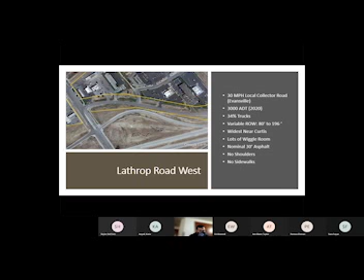Here's Lathrop Road to the west. The right-of-way narrows down to about 80 feet out in here. It's all 30 miles an hour. Functions as a local collector. It really doesn't have any problems, and we don't foresee any capacity problems, at least nothing in the near future.

What isn't there is pedestrian facilities. You've got a pedestrian generator right here, mobile home park. You've got pedestrian attractors down here, all these restaurants and commercial facilities, and no way to get between them without walking in the grass or on the road. So that's an issue to be addressed.

Here's Blackmore Road. As I said, it was realigned. It's about an 80-foot right-of-way. It was realigned about 2003.

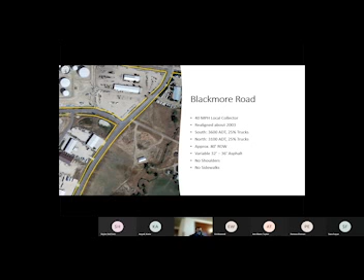Right now it has a maximum of about 3,600 vehicles per day. And what you'll get during the peak hour is about 1/10 of that. So it'd be about 360 with a 60-40 split. So you're looking at, a PM peak hour, 360 vehicles, about 200 in one direction, 160 in the other. So it's really not that busy traffic. If you think about it, 360 vehicles in 60 minutes works out to 6 vehicles a minute. So it's pretty easy to get across.

Here's US 20/26 Yellowstone Highway. This one has about double the traffic as Blackmore. It's a 55-mile-an-hour state principal arterial. That might need to change. What's happening is all that urban development is taking place on a road that used to be a rural highway. Now it's an urban area, so it's time to rethink what speed is appropriate in that location.

Another interesting aspect of this is, and we've got a comment from a citizen about a pedestrian crossing in this area. The nearest pedestrian crossing is 1.4 miles away. And I went out there with two experienced traffic engineers, and they looked at it and they said, we don't want pedestrians out there. So there's this conflict going on between the safety of pedestrians and asking them to walk almost 3 miles round trip to the nearest crosswalk, which is unrealistic. They're going to cross somewhere. Somebody's going to need to cross, and they're going to cross somewhere. So some solution to that is necessary.

One of the problems with this location is this is a crowned surface, and what that means is the road's tilted as an arc, like so. So when you look at on the near side, you can see the lanes. But when you look at the far side, you can't see the lane stripes because it's lined up with your eyes. The road surface is right there, so you can't see your target lane from Blackmore Road. That's another concern.

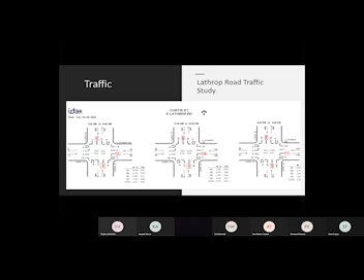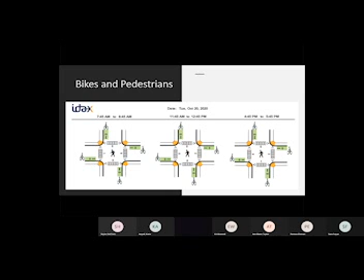Here's pedestrians and bicycles. On this particular day it was kind of chilly, so there weren't any bicyclists out, but there were quite a few pedestrians. During the AM peak there was only one here. There were 5 here. During midday there were 2 that crossed on the east side. Then during the afternoon peak there were 4 on the west side, 2 on the east side, and 1 sprinter. There's no crosswalk there. I don't know if he made it all the way across in one jump or if he stopped at the center turn lane, but there's a reason why people do that.

We've got quite a few trucks - in some cases 35% trucks, which is pretty high. Other places have fewer, 20% or so. But the WYDOT design vehicle for all WYDOT roads, including Curtis Street and US 20/26, is what's called a WB62, a 62-foot long semi. So the geometry of the road has to accommodate that vehicle, and when it turns, it sweeps out this path. If it makes a U-turn, it sweeps out that entire width you see here. If it's making a short turn, the width is much narrower. If it's making a 90-degree turn, the width is like that. So that's what the roadway system has to accommodate geometrically.

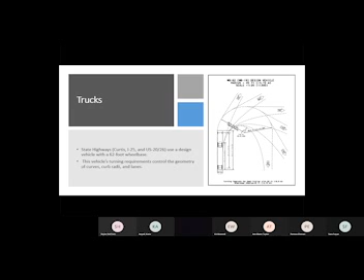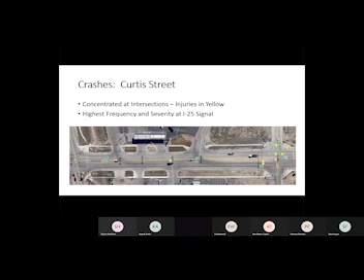We've got a few of these crashes that were keyed onto Curtis Street. And then when I asked for the Lathrop Road one, this is what they came up with. There's 10 of them that were keyed onto Lathrop Road. So that intersection is having a lot of crashes, you know?

So all this data is pointing to one thing. We've got a lot of vehicles crossing each other. We've got tire marks on the pavement showing that people are squawking it to get out of there, and the pattern is proving it out.

I did want to point out down here where I said there was very low volumes, there's no crashes either. Traffic causes crashes, and there's no traffic, so there's no crash. Now here's the intersection of Blackmore and US 20/26 Yellowstone Highway.

This one here, I described a problem where it's difficult for a driver at this location to see where he's going out here because of the crown of the road. Looking at it from straight above, you can see the stripes and everything's obvious, but from the ground level, you can't see it.

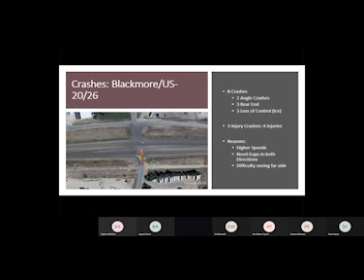That covers the safety aspects. I wanted to talk about roadway functional class, which is another exciting aspect.

There's basically 4 types of roads: a freeway, an arterial, a collector road, and a local street. And they have different functions.

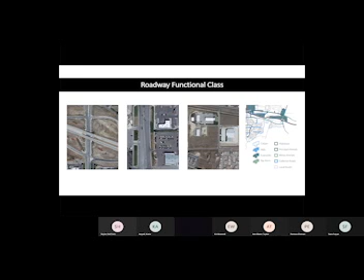This is just repeating what I just said: higher speed for mobility like freeways, stepping down to arterials, collector streets, and then local streets. The speed goes down, the number of driveways goes up. The purpose of local streets is for access, the purpose of major arterials is for mobility, and there's a step down in between.

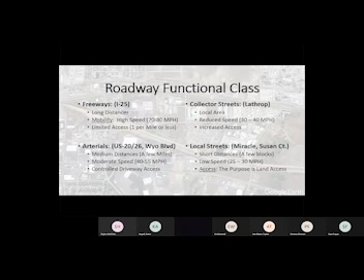So we're looking at this from a standpoint of making the roads function the way they're intended and function more safely. Access management is a key principle of doing that.

Now, I just wanted to compare the slide on the left and the slide on the right. The slide on the left has 3 driveways, and there's no median, so it's wide open movements. Each one of these can turn right, turn left, go straight across, people can turn right in.

And when they do that, each one of these has 8 conflict points. So you can get hit here, you can get hit here, you can get hit by this movement. When you put them all together, you've got 24 different conflict points, or 24 different places where a crash can take place, where vehicle movements are crossing each other. If you reduce that to one driveway, it reduces the number of conflicts from 24 to 8.

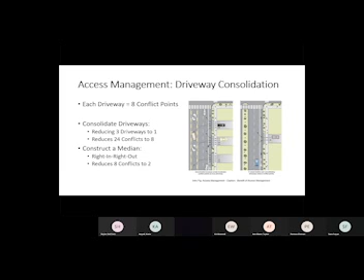Here are a couple more ways. This one shows a median with a cut through. Here you allow a left turn out of the driveway, and he can hit the people turning into the driveway, he can hit somebody crossing this way, he can hit somebody crossing in the other lane, and he can hit somebody crossing in the opposite lane.

So this is kind of like Lathrop right here. Lathrop's, you're trying to make a left turn, and there's 1, 2, 3, 4 different places you can get hit. And that's what drivers are contending with.

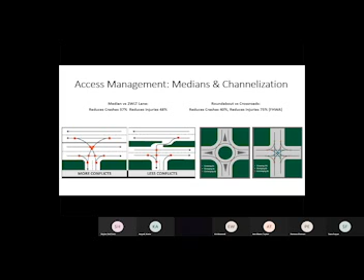By comparison, if you put a median or a roundabout in the center of this and force everybody to slow down, you go from 32 conflict points to 8. Instead of being crossing conflicts, they're merging and diverge conflicts, so they're much slower and much more survivable. Put simply, in this type of crossroad intersection, the penalty for a mistake is very severe. In this roundabout type intersection, the penalty for a mistake is a fender bender, but you probably will not get hauled away to the hospital. So that's an important point.

Here's another type. This is unusual. This is a median U-turn, or indirect left turns. They were invented in Detroit, and there they call them Michigan lefts. In this case, you just eliminate the crossing movements, you eliminate the left turns here, and they're all gone.

So the only thing you can do, say if you're on Blackmore, is to pull up here, look to your left, nobody coming, make your right turn, stop here, look to your right, nobody coming, complete your turn. This takes the complexity of that decision coming off of Blackmore and simplifies it. Instead of looking in two directions where it's hard to discern what's going on, you only look in one direction, and the same thing in the opposite direction. So it separates out those two decisions into two separate locations, so you don't have to do it all at once. You don't have to have eyes in the back of your head.

So are there any examples of this anywhere right now? No, nothing quite like this. Now, Jeremy, you were saying you had something similar to this? I was thinking about some of the mitigated medians at CY and Hopper, going by Albertsons and things like that, but nothing quite like this.

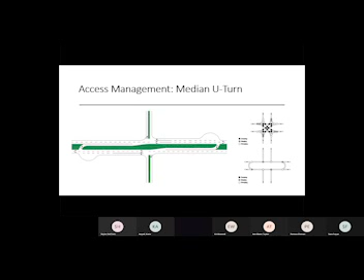Like I said, I've got a better slide here in a little bit, I'll show you what it looks like. But at any rate, you've eliminated a lot of conflict points here, and you've solved some of the issues. But no intersection is perfect.

Here's a non-motorized system, or half of it anyway. There's a pretty good sidewalk on Curtis Street, this is the east side. I do not know what this is for. There's this gravel area that chunked out of the sidewalk, and I don't know how that got there or why.

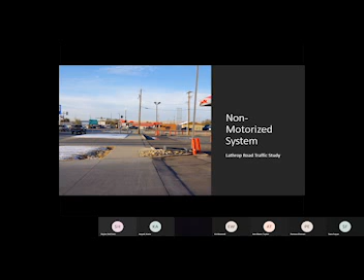I found a sidewalk over in Cokeville that has a telephone pole in the middle of it. Why they built it that way is anybody's guess. But looking at the existing sidewalks, this is it—this is all there are in our study area.

They're in pretty good condition and follow the outside right-of-way along Curtis Street. This is the east side of Curtis, this is the west side. This is US 20 Yellowstone, and this is the I-25 westbound ramps.

The east sidewalk comes along here, then goes across, and then there's no sidewalk over here—I don't know why. On the west side, it continues; you can see the sidewalk on this side. The crossing is kind of misaligned, I'm not sure how that was laid out, but you've got pretty good pedestrian service along here.

The sidewalks are nice and wide, meeting Americans with Disabilities Act standards. They've all got ramps and are at least 5 feet wide, so they're sufficient for what they do. But there are no sidewalks on Lathrop, none at all on Blackmore, and those are becoming issues.

Here's the crosswalks—you have 2 crosswalks on Curtis. One is right here, a marked zebra crossing with pedestrian-actuated signals and a walk/no walk sign. Same thing down here, except there's no zebra crossing, no marked crosswalk, but you do have pedestrian-actuated signal heads, so there's a pedestrian phase if the pedestrian pushes the button.

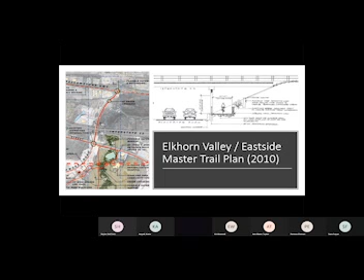So rather than try and compete with it, we're going to work with it. We propose to build a crosswalk from Lathrop across Blackmore to the Blackmore Trail, so they'd be able to connect in either direction to the rest of the network. The hope is at some point they'll build a trail on the other side as well.

Our natural assets inventory was part of the study, and this is Pat Ehrman. She's a very intrepid landscape architect. On this very cold day, she walked the entire corridor, making notes, taking pictures, and seeing what was there. She spotted a lot of stuff and came up with some great ideas. I'm just glad she's part of the team.

So what did she spot? This is one of the pictures that she took up on top of the hill. I think this is near one of the hotels.

Outback, yeah. From here you've got a really broad vista, and this whole area between that parking lot and Lathrop Road is all public right-of-way. So there's plenty of room here to have some kind of pedestrian waypoint where you could have a bench, maybe even a shelter of some sort, so that pedestrians, after climbing the hill or on their way up, see the view and want to stop and enjoy it. They could sit right there and enjoy the view and rest for a minute on the way down the trail.

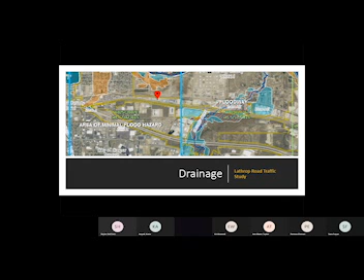Utilities - Mr. Lambert finished up working with Shane yesterday talking about issues in here. I won't go into an incredible amount of detail other than to say, and Shane correct me if I get this garbled, the study area seems to have plenty of wastewater capacity. There are some concerns about the potable water system.

There are 2 water tanks. I'm not sure exactly where they are - this scale is difficult to see - but there's a lower water tank and a higher water tank. In order to serve this area, which is higher than the rest of Evansville, water is pumped from the lower tank up to the higher tank, then flows down by gravity to service this area.

What Lou is saying is there's not a lot of locations where the future system was well thought out. It's not well looped. Typically, when you build a water system, you want 2 loops so it can flow in both directions and get better capacity. Also, there's only 1 line that runs up to the higher water tank, so if anything happens to that line or the pump, you lose water in this whole area. That's a place where a redundant system might be a good idea in the future. But I'll leave it at that and let the engineers talk about it in detail on their own.

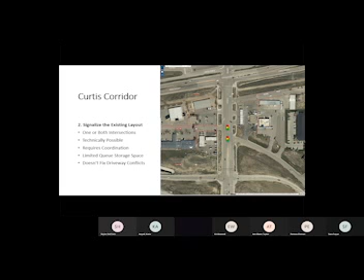It also doesn't fix the conflicts with the driveways. You still got these driveways sitting up here, and you've got this one that's very close to this signal. So how do you coordinate that with this driveway? And so it's still an issue.

And here's a solution that's been proposed for some years. This would be to realign Lathrop Road with Luker Lane. So you would move Lathrop to the north and tie it in with Luker Lane with a signal.

This solves some problems, but it creates others. One is you've lost all the pedestrian space along the north side of Lathrop. In order to line it up with Luker, you lose that space. So all of this right-of-way is now gone, and all your open space is down here near the interstate.

So now you've got a problem of where do you put the pedestrians? Maybe you put the crossing out here someplace, I don't know. But now you've also created another cross intersection, and we've talked about those previously, where the severity can be pretty bad. So this is a solution, solves some problems, maybe creates other problems, and again, there's no perfect solution to anything.

Another one would be closed driveways. From our traffic counts, we found that this driveway has no traffic. Right now, people drive across the adjacent lot to get to it. So people pull in here to go there. There's a few using this. Most use this, Luker Lane, because this appears to be a street, and most people think it is. Maybe it should be a street.

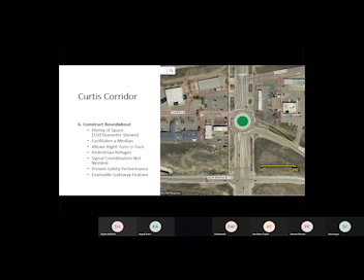If we look at the previous one, what this does is it creates a right in and right out of these driveways. This driveway would have to go away, but you'd have this driveway and this driveway. And then if they want to turn left, they would exit down here, turn right, and then make their left turn at the roundabout. So it eliminates all the left turns in the system - instead of turning left, they turn right and make a U-turn.

All right, let's look at Lathrop. Again, this road has no capacity issues that we could find, with the exception of the Curtis Street intersection. Some improved street lighting in strategic locations, provision of sidewalks or a greenway type shared use non-motorized facility would go a long way to making this road a lot more pleasant environment for everyone.

And again, as Pat mentioned or described in her report, we would have 7 different waypoints along the way where we would have perhaps shade, some kind of maybe a bench, just a wide area - something to set it apart from the rest of the corridor and make it a resting place.

Lathrop at Blackmore - we went out there with our safety expert and our civil engineer. Our safety expert is Del McCombie. He used to be the head engineer for WYDOT some years ago, and really knows his stuff. He spots things that I don't even notice.

But one of the things he noticed was that when they widened this road to accommodate trucks, they widened these radii. They moved the stop sign back, and it's now out of the view of the approaching drivers on Lathrop. It's set so far back that if a driver actually stops here, they can't see past this fence to oncoming traffic southbound on Blackmore.

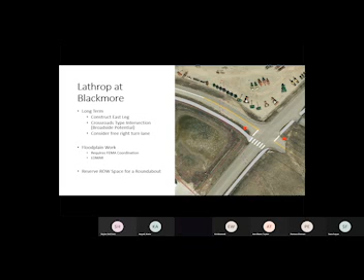Second consideration, and this is probably equally important or more so, is that when this goes in, the design is going to have to include consideration of the floodway along Elkhorn Creek. You don't want to build a road that causes an increase in flood potential and damage to some property that wasn't in danger before. So that's another issue.

Here's Blackmore at Yellowstone. Again, this is the no action alternative. Blackmore is 40 miles an hour and stop controlled at this location. Yellowstone Road is 55 miles an hour through here.

Our safety engineer suggested dropping this from 55 to 40 through this intersection because of the urbanization of the area. He thought that would be a good safety improvement.

This is our minimalist alternative, the low-cost alternative. This is fairly simple: update the signs and markings. Right now there's a one-way sign right here, which is incorrect. It's left over from decades ago, before they changed the configuration of this boulevard.

There's no indication that there's any pedestrian facility, so we'd recommend a pedestrian bike crossing sign here and here, so drivers become aware they should be looking for pedestrians. We'd reinforce these signs and the markings on the roadway. This one shows a dotted left turn line to indicate to this driver where he should be aiming in his left turn, and the same would be true for the southbound driver—he's making a left turn, follows the dots.

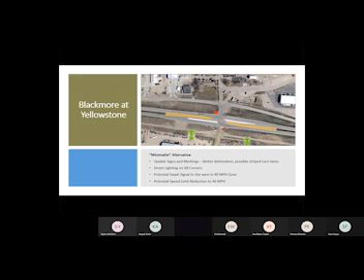Now, if we change the configuration—and this is the one the chief was talking about earlier, this probably shows it a little bit better—this does accommodate trucks. Now, say you're coming in from the west and you want to get to the refinery.

You come in this way, get out into the left turn lane, and stop at the stop bar and stop sign. When you get a gap in this direction, just complete your maneuver and pull in. So instead of trying to clear traffic in both directions, you're only clearing one.

Now this guy has an even better situation, because instead of trying to clear traffic in this direction, where you've got 3,000 vehicles a day, and in this direction another 3,000 vehicles a day, and they're all randomly dispersed and going at different speeds - some going 55, some maybe 60, 70 miles an hour, because it's Wyoming.

So if you can break that decision into two decisions, you only need to get a gap in this direction and in this direction, and then you can make your turn. It's going to be a nightmare in the winter time, and I'm a truck driver.

Well, it works. It would take getting used to, I'll admit. There are going to be folks out there who are not going to like it. But Michigan has hundreds and hundreds of these. Different speeds and different weather.

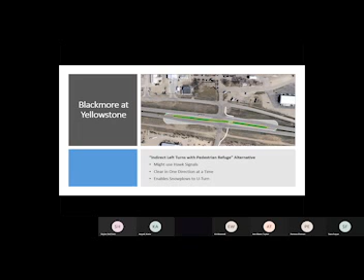It could be located over here, it could be located down here, it could be located right here. This is just one concept. So anyway, this gives you a place to put a pedestrian crossing where you didn't have one before. So that's a solution.

So that's it. That's as many different things as I could think of to skin this cat. First thing the planner always asks the engineers is, 'Are you sure you want to skin that cat?' But then figure out, okay, if you're sure you want to skin it, what's the best way to skin it? And that's what I'm going to ask you folks right now.

Of all these different things, what do you think's nuts? What do you think might work? What do you think we ought to do first? What should we do later? And I hope - did everybody get a survey form back in the back? Did everybody? We need your thoughts on this. Let us know if we're way off base or something makes a lot of sense to you. If you see this solves the problem, that solves the problem.

Chad, you said you had a concept. Can you come up and show us? Well, it's just kind of easy after the median. Let me get you. There you go.

You got your roads. So which intersection was this one? 2026 and Blackmore. Okay, there's the way it is now.

One of your proposals was putting a median in here, in the middle. Where if you took this and you just put the left-hand turn going into a median lane - I've got a solution for it. Hang on, this way we can understand. Go on. No, I want to go up.

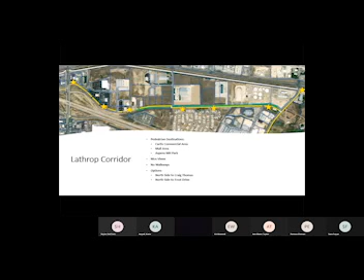Which one is that, chief? Curtis corridor, single wide right there. You know, I don't particularly like roundabouts, but everybody hates them until they try them, and then they figure it out. I drive it all the time, I still hate it.

So here, lining this up because of the truck traffic and how much volume is coming this way, moving this up here and creating a bypass, like a merge in a sense here. I'm not the best artist, but as they come in, they can merge over. A lot of times the way this is, it's frustrating for people, especially at night when it's lit, but having something there, then all you have is your exit traffic, and they're not having to worry about people turning in.

Just, you saw how beat up this is with all the semis that come through here. Yeah, I meant to mention that and forgot. Thanks for bringing it up. Same thing with that roundabout, those semis are going to destroy that through there. I think having something like this will slow the traffic, eliminate this right here. They really don't need to because there's enough traffic coming this way, or just have it moved out here with their parking lots.

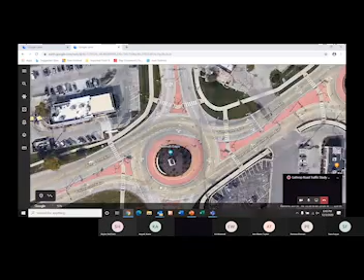But if you call the traffic engineer for Neenah, Wisconsin, and ask if folks there like it, they love it. One of the things that happened is shortly after this was built, 3 new big box developments moved in. This whole block here was dead commercial, very poor access, you couldn't get to it. Now you can get to it very easily from any direction. All right turns, no left turns in the system.

But let's compare that to the 2nd Street intersection. I'm willing to bet that at that same time, the intersection of 2nd Street and Wyoming Boulevard had... if I can find Casper here. All right, where are the roads?

Here's Casper at 2nd Street. All right, here they are, waiting at the light. How many people are actually in the intersection? Only 3, the others are just waiting, because there's only so many seconds in a minute and they're all backed up waiting for the green. There's so many different phases here that they can't get through. At the other intersection, when the opposing flow lightens up, they just go. They never even have to stop.

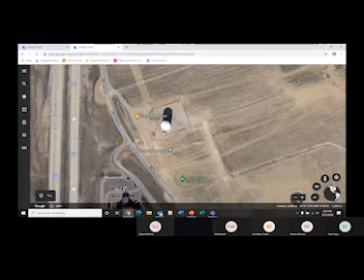Gas station, whatever. Yeah, and - well, what we found from the field review is there's just nothing along here on the south side of Lathrop of any real interest until you get to here, and then you've got the 'come on in' of course. Aren't you gonna see a lot of foot traffic come on in over to the restaurant? Yeah, and I agree with that absolutely - maybe some kind of crossing in this location makes sense. You've got enough space here, maybe you could put some kind of traffic calming device, overhead, a median, refuge. I don't know, but that's definitely something we need to look at - what about a crosswalk at Miracle?

Again, coming up the hill, look in the opposite direction - there's Miracle. So do we have good sight stopping distance? So here's your crosswalk out here, coming up the hill. There's not a lot else to look at, so maybe they would be looking at the location, but I think some kind of device to draw attention to a pedestrian crossing makes sense.

I'll mention that to our traffic engineers, see what they suggest. While we're talking about crosswalks, you haven't mentioned a crosswalk on the Great Towns Boulevard at the rail trail.

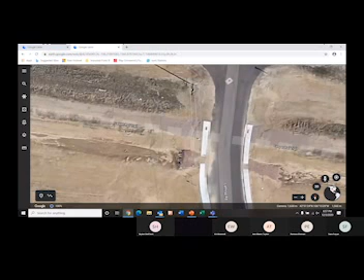This is probably a good time to point out that next year we have scheduled for Evansville a trail interconnectivity study, which would be a useful thing. Evansville is sort of marooned from this larger Casper trail system.

One of the things I should mention is that the American Association of State Highways and Transportation Officials has warrants for crosswalks of various types. You have to have a certain volume of traffic and a certain number of pedestrians to warrant this type of crossing and a certain number for this type, and MUTCD has the same kinds of things.

One of the reasons is that engineers have a license. The last thing they want to do is lose their license. If somebody sues them for not following the rules, then they can lose their license. So they're very averse to doing that. Not following the AASHTO guidance, not following the MUTCD guidance is something they're really loath to do.

At this location, my guess is that it wouldn't meet the warrants for volumes for a pedestrian crossing. But there's no reason you couldn't put some signs here indicating that the pedestrian crossing is at this location, or trail crossing, something of that sort. There is a trail, and it is crossing, so a trail crossing sign makes perfect sense. That would at least inform drivers that they need to be on the lookout at this spot. So maybe that's the solution engineers would be comfortable with, without losing their license. Just a sign indicating trail crossing.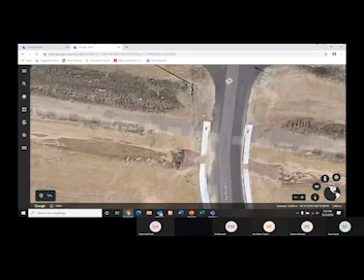I could see foot traffic going up on the rail trail if kids and families from the Aspens go to the older part of Evansville, take the rail trail down to Curtis, and then cross at Curtis to get into the older part of Evansville. If what I'm told happens, that will come, but until they actually sign the dotted line...

Right now, going from this side across to the old side of Evansville, you're taking Blackmore in and trying to cross the street. Right up here at Curtis, on 20/26, you've got the road - yeah, the main highway right there. It's a very difficult crossing, a long way across, and it's the only way across.

Where are we now? We're right here, aren't we? Iron Street, right here? Yeah, we're right there. Well, when I got here, I was setting up earlier.

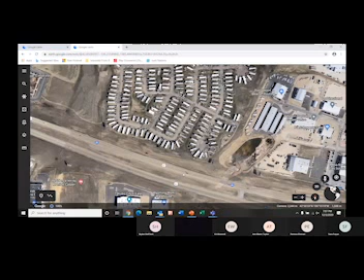I used to fly KC-135s in the Air Force, 100,000 pounds of kerosene going 600 miles an hour. The plane's older than I am. My last question before we took off was, what could possibly go wrong? And that's how I look at everything here, what can possibly go wrong.

And the safety audit is a great new treatment. I wish we could say the U.S. invented it. It was actually invented by the Brits, but they came up with a lot of good ideas, like radar. But the idea is to go out there with experts, look at it and think, what kind of conflicts are here? What crashes are potentially going to happen? Don't wait for them to happen, but try and anticipate it ahead of time. Just like you were saying, Chief, don't wait until it happens, deal with it ahead of time.

Like I said, there's no solution that's perfect. I do like the idea of a roundabout because it lines up the side roads. It handles the left turn conflicts. It creates pedestrian refuges. It gets rid of the left turns. It provides places to put a median so that you can have a pedestrian refuge and eliminate those crossing conflicts on the side road driveways. It just does a lot of things that you can't do with anything else. And a big part of that is the U-turn capability. When you've got a place to turn around, you can eliminate left turns and just use right turns and U-turns to turn left. So that's an advantage to that.

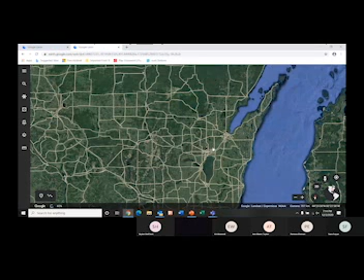I did not realize how to use this version of Google Earth. I'd like to show you — I know, Mayor, you were wanting an entry feature for the community, what do they call it? A gateway — I want to show you a gateway. I neglected to mention earlier, this again is Neenah, Wisconsin. All right, where'd I put Neenah? Here it is.

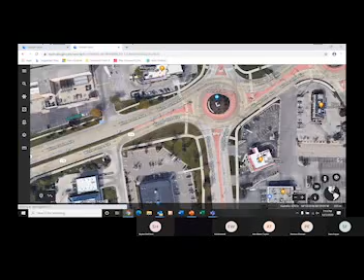While he's looking at that — Mr. Mayor, you've seen our wayfinding plan, right? That was a big part of the discussion. Yeah, it just came up when this was coming in here. I mentioned that our wayfinding plan has ideas. Here you go, Mayor.

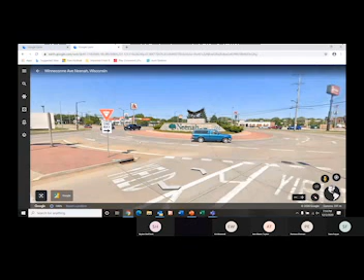This doesn't look very good on the screen, but this is the entry point for Neenah, Wisconsin now. They just love it — ask anybody on the street, ask anybody in town, ask the traffic engineer, they just love this thing. I'll show you some different ones here. They all have crosswalks on them. They're all very safe.

Yeah, this is one of my proudest projects, working on this. It's very tidy, very clean, very pretty — a very pleasant environment. Like I said, you've got all this new commercial development. When the traffic cleared out and the access became easy, all these big box developers showed up. All this is brand new. That's what they wanted us to accomplish, to get their town to develop, and that's exactly what happened.

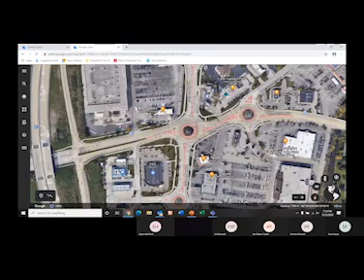Here's another one. So that's what it looks like — very pretty, all ADA compliant, very low speed, everything's 20 miles an hour. So anyway, that's what I wanted to show you.

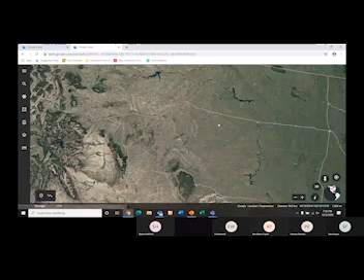That's the gateway treatment that they have there, and that's essentially what you could do in Evansville. If I can find Evansville again — where am I here? It's the Black Hills. It looks like Casper. Yeah, we're home.

Mr. Mayor, does anyone else have any questions? Any more ideas? By all means, let me know. If there's something we haven't turned over, some leaf we haven't looked under, any ideas we haven't thought of yet. There's been some great stuff so far, but if there's anything, any other concerns, any issues that we haven't thought of, any safety concerns about this corridor.

My objective as an urban planner — and I'm getting old, getting toward retirement — I really want to create a nice built environment that people will enjoy and be safe and meet the needs of the community. This will be one of my last projects before I go spend time with the family, as they say.

But again, I think maybe a mixture of these different treatments is the best solution: consolidating a couple of driveways here, eliminating left turn conflicts here, closing a driveway here, rearranging the access by running a median here, so people would enter off of Curtis and exit onto Lathrop. You create a one-way flow here and a circular flow here that eliminates the left turn conflicts.

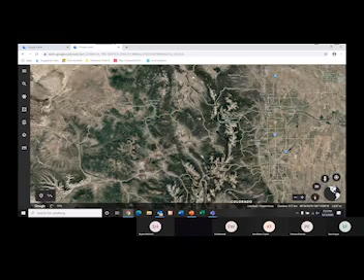Right, all right, where am I here? They are. I was just about to make that guess.

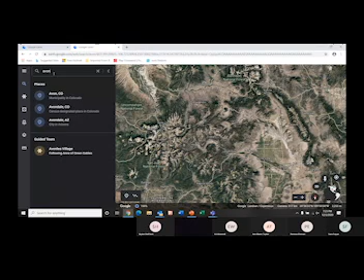Let's see, Avon, Colorado. So when I was on the other side of the state, all over the place on there, I hated the roundabouts. I don't know what it is about them, but they're just pretty irritating.

Well, I used to work for Ourston Roundabout Engineering. We were the best. We worked with the best designers, we were taught by the best designer. And it's always, always, always the design. If you get a bad designer designing a roundabout, and it's the wrong kind, you're not going to like it.

I agree. But now here's a corridor. This used to be your typical 5-lane Kmart corridor, like Dell Range Boulevard. This is what this was, and it's been entirely transformed. This was done in 1995 by a friend of mine. And this is Avon Road.

And as you say, you could put a roundabout here, you could put a roundabout there, you could put a roundabout there. They like this so much that they've built dozens of these all over the place, all through their network. The people just love it. And the difference here is these were designed right from the get-go.

You don't want somebody designing who doesn't know what they're doing. I know that some of them, if we know our community, we drive through here all the time. We can do it with our eyes closed, but you go somewhere different.

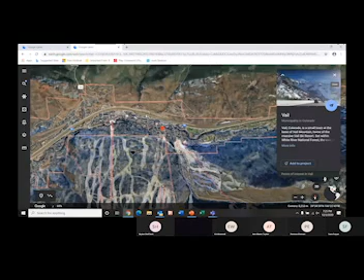And you're trying to find where you're going, and sometimes the place you need to go is this direction, and well, I'll tell you what, try it in England. I did it. You can do it, I mean you drive on the left.

But here's the trick. Everybody says, well, I'm kind of timid about roundabouts, so I'm going to stay way over on the right. Well, the only thing you can do in the right lane is turn right. If you don't know where you're going, get in the left lane. You can go around that circle as long as you want, nobody will notice, and keep going around until you find, oh, that's the exit I want. Out you go. That's the trick to it.

Wyoming, sure, just like typical on the communities, they always want to hire some goofball from some other state to be chief of police. They come in and a year later they fire them because they don't like their ideas. They don't mesh with how we view things.

But on the other hand, a highway fatality is the same in Detroit as it is in Miami, as it is in Casper, in Mills, anywhere in Natrona. It's the same. It's a terrible tragedy. And anytime you design an intersection like that, and fire vehicles into it at 45, 55 miles an hour, and hope nobody makes a mistake, because if they do, the consequences are devastating.

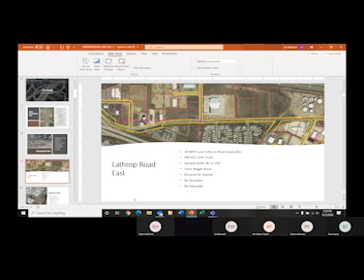The trickiest problem is right here. Right at... where was I going with this? My mind's getting muddled. It'll come to me when I don't need it anymore. It's not working like it used to. But—

Yeah, this problem along here is kind of tricky. Now, one of the things about, if you were to use a roundabout here, it gives you a whole lot of leeway on the alignment. So you're talking about this radius here. We could move this road all the way over and arc it back to the right, and that would create that radius that you need in order to make that turn. And then it wouldn't have trucks running over the sidewalks. Bring it back here.

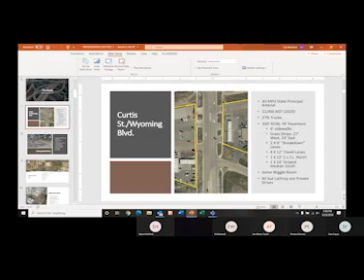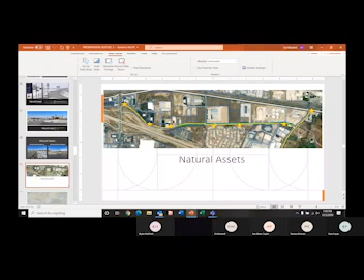Now that's a 150-foot diameter. We could actually make it a little bit larger, but this road could be realigned to the east. So this would come along here, and this would come over to the east and then arc back to the right. So that gives you what's called your entry path deflection, and that would cause the traffic to slow before it reaches the circle. And then this could be arced way over and then brought back, so you've got that big wide radius for the semi, so you don't wind up with it crossing over the sidewalks.

And the sidewalks are set back one car length from the yield line. You know why that is? I don't know why we never thought of this. When the driver pulls up here, he's looking to the left, right? If there's a crosswalk in front of him and this driver's looking to the left for a gap and somebody comes in from his right, they're gonna get run over. If you put the crosswalk behind him, you can't possibly get run over by that guy, right? Duh, why didn't we think of that?

These are all things I've been looking at for 20 years now, and it's amazing the number of solutions this creates. But by putting this in, we can put a median here. And then down here you could have one of those Colorado U-turns, and then they could come back here, and that means these people could turn right and then come back here and go on their way, get onto the interstate. You could continue the median all the way down to the I-25 westbound ramp. You put a one-way sign on the end of that.

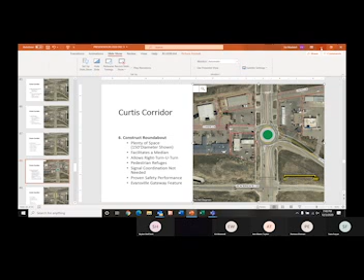I'd show it to you, but there's so many. They've built hundreds of them now. But it was a long process.

Well, does anybody have any other questions? Yeah, sorry about talking about roundabouts so much, I just love the thing.